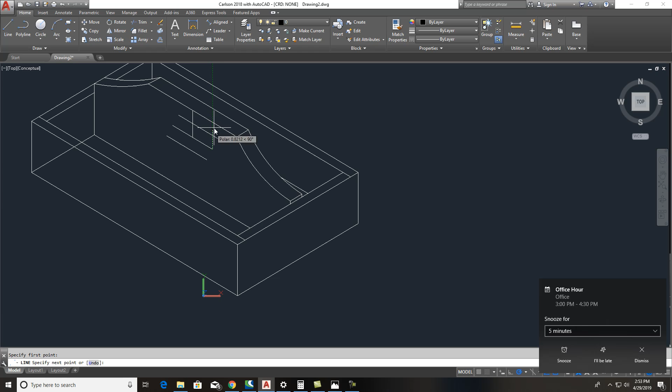It would be 1 inch, so it'd be a 1/2 inch offset of 1/2 of an inch. Make sure offset 1/2 inch up, 1/2 inch down, and then the line, we are coming off this line right here, coming straight up at that angle. Zoom in there, and I want to bring that line straight down.

Same thing over here, because the midpoint I had it exactly correct, and all I have to do once I get that in there is do a trim and clean all that up on that, and then we'll extend over.

Just like that, and trim, or we can actually just grab the grips at that point and pull down. So I'll show you real quick how to do this, and it's pretty simple.

What you want to do is, this is the center point right here, and this is the center point over here. And what I do at this point is, we have got to get that curve going. So I want to show you how this works. It's not on all of them, but what I would do is, it's another inch past this point right here. So I go another inch over.

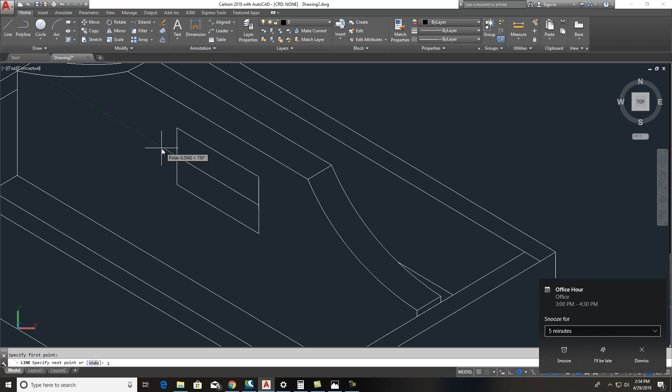And I want to make sure that it was an inch. It looks a little bit longer than an inch, so it is an inch up that way, and then it's going to come another inch down this way.

Okay, and then at that point I'll just grab this, and I'll do a copy, move that out there to that point, and I'll move it to that end point right there, and just grab, pull those on over into those positions.

And you kind of at that point are getting an idea of how this thing's starting, it will look. This is how you do that. So inside this box here, this is your center point.

Oh, wait. That should have been 1/2 of an inch. I've got it going 1 inch. So what I need to do is back that up just a little bit, about halfway.

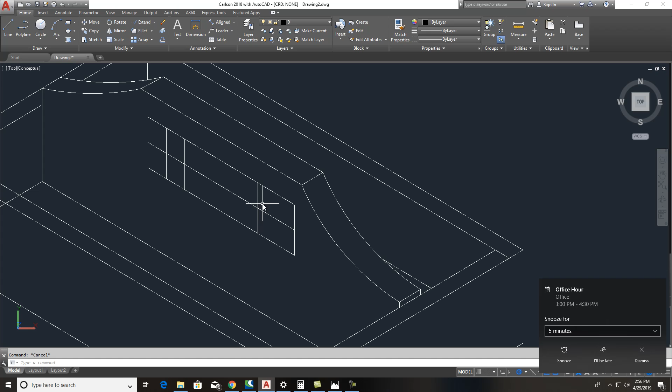Again, what I would do, just do a move. I'd grab this from there. I thought that looked a little bit too far to there. And we'll do a move on this one. Move from there to there.

And we'll do an old trim, and we'll trim out all that junk. Went a little bit too far with that. That's fine. So what you want to do at this point to figure out how to get that in there accurately.

This works with anything, it's called plotting points. Now I want to take, and I want to get this one piece right here, I want to bust it up. So I go up here, and there's a tool called break at point, right here it is, break at point. Click on it, click your line, and then click at that point, and see how it separates it, makes it one piece.

And you want to do that down here too. Break at point, click that, and come down here and click that. Now see how it's separate pieces? And you could always do this. You could always just grab that and pull that back, and it'd be a line by itself, and then pull this over. You know, you could do that, and that makes it individual pieces.

Just whatever works for you. It all works the same.

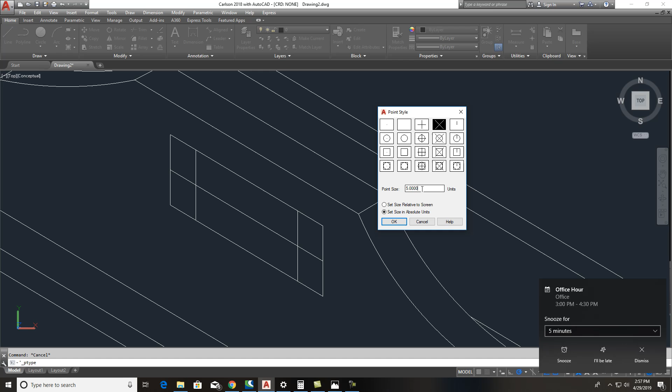Now, what we got to do is, I want to show you, you're going to go up here and click this button and hit Show Menu Bar, and go to Format, Point Styles, and I want to click on this, Absolute Units, and I'll do like a 0.25. Okay, and then I'm going to come back up here, and I'm going to go to Draw, and I'm going to do Points. Let's just see, that's perfect, that point is.

It's a little bit big, so I'll go up here to Format, Point Style again, and let's make that a little smaller, like 0.100.

That's getting there. Maybe a little bit smaller. I don't want them too big. Let's go about 0.05. That's perfect.

So what you want to do is, with that style on, hit Line, and this one right here I want to bust this thing up, let's say 4 times. Come up here again and see how these points, there are multiple points. Here is divide. You're going to divide this line up 4 times, let's say. You see that? Then you come up here to this one right here and do the same thing, divide it up 4 times. So whatever you divide this one up, you divide this one the same amount.

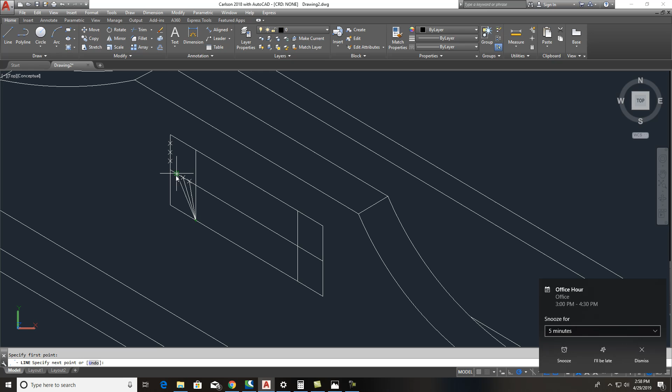You take your line and go from this point and come up here and hit these points right here from this quadrant point on here, just like that. Then you're going to hit extend, because those lines have to come all the way up and touch these 2 lines. Right click to enter, click on these, and you see how it kind of pulls them up. Now you come off the top of here and you click onto these guys here, just like that, into there.

And now where these cross at is going to be your points. So you just go up here and hit draw points and click this one to this one, zoom in here to that one, and then on down here to this one, and we'll hit a point right there. So once you get those in, I'll clean these lines up.

You can see it now how it's going to go. If I have me another point in there, which you don't have to have the points because we'll take them back out. But don't get the segment of the lines confused. But if you come up here now, hit Polyline, you go from here to there to there to this one and then on down. You'll have that part of it done.

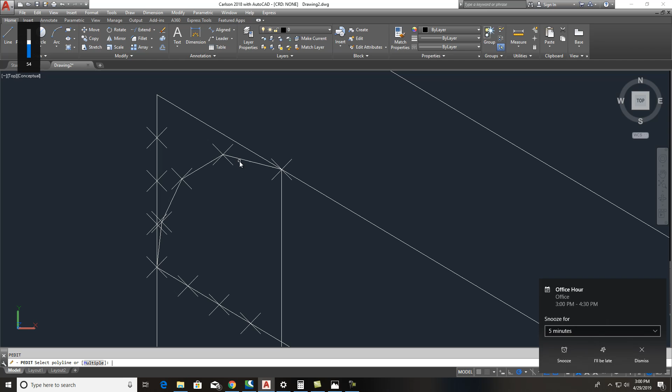Now I know it looks a little bit choppy. The more points you have, the better it is. But if you remember, if you PEdit and hit click on it and hit fit, it'll smooth it out.

You see that? Now I can go ahead and delete these because I don't need these. I need these again because I need to do the bottom. And you can see that. Now I got that, so I don't need these points anymore, so I'm going to delete those out. I use those to get that. So there's my top curve.

Now let's get the bottom one down here. So again I got to divide and bust this line up right here. And that's easy to do - come up here to draw, click on divide, click on this 4 times because that's what this one is.

Hit your line, come up here from the top, and remember, hit these right here first, just like that. And then you're coming down here to from this pole, and you're hitting these points. It's always, if the ones on the side, always you hit them from the quadrant that you're in, like this one. You see that?

And then hit extend, click on these 2 segments, and then come up here and click these, and it'll shoot those lines on out to those. And now you're ready to put points in. There's a point, there's a point, there's a point, and it'll close it up right there.

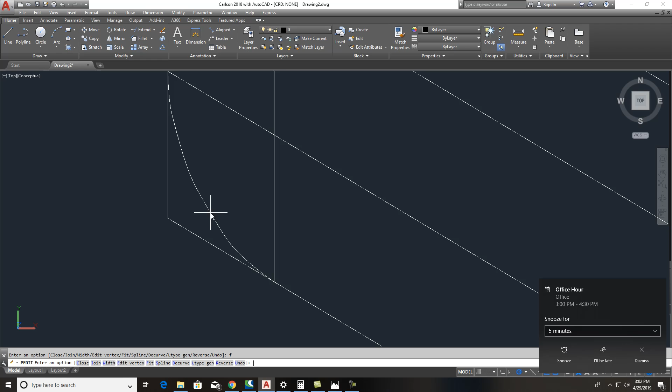We just got to do a polyline edit and smooth it out. PE, enter, click on it, and hit fit. It smooths it. You see how it smooths that out?

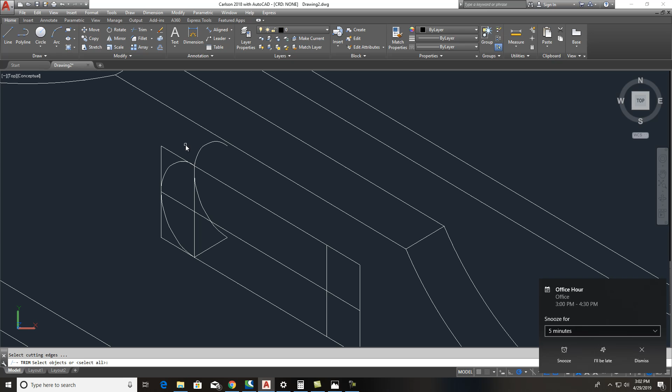Now all you have to do, line. This is a 1/2 inch thick, I think - yeah, 0.5. So right there is going to be the end of that. So you just grab this, and then you're going to do a copy and catch it from there to there, and just trim out what you won't see, like this. You won't see all this up here.

Those segments, just make sure you get rid of those. You don't need that anymore. And you'll see that part of it. Now this line will actually come straight down through here, and we'll just take it to there for now. And you won't have that little line right there, it'll just be a curve in it. And then you can go ahead and get rid of these segments here as well. You can start to see how that's starting to come around.

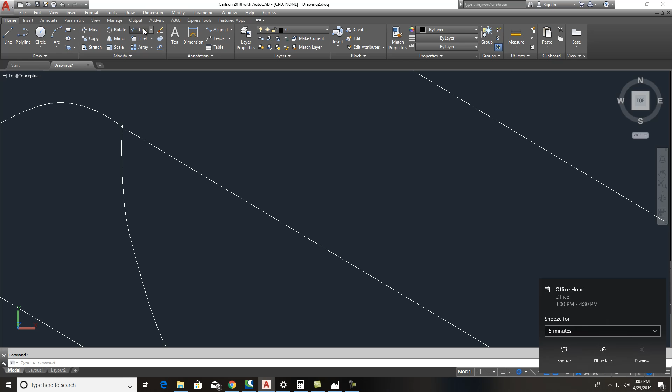Trim, there's a little segment there that needs to come out. Okay, and then all you got to do is come down here and do the same thing on this side, same thing as what we did over here, and I'll show you on that.

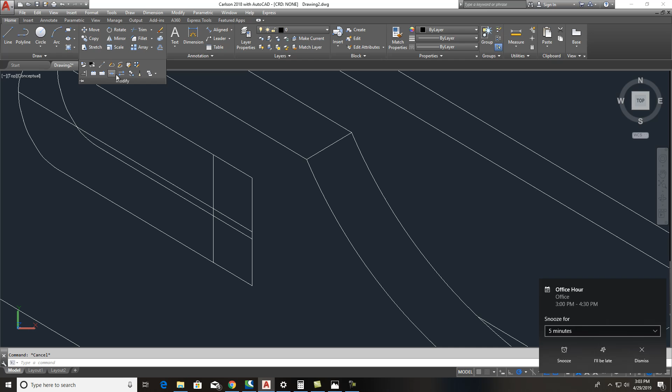Again, come up here, we need to bust this right here up. Okay, and then we need to bust this one up. So again, modify, break at point, click this right there. See, this is a segment, this is a segment. Wait just a minute, I think I got confused on that.

This right here is my center line. So what I'd have to do is pull that back up there to there and pull this one up there to there. So our segment pieces look good, looks great. And I need to bust this line right here up, so break again at point. And see, those are segment pieces.

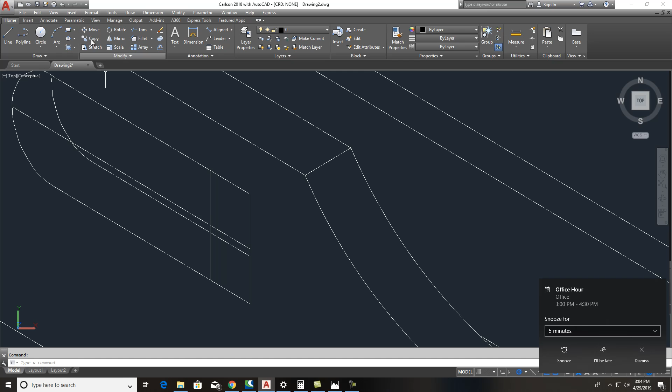And all I got to do again, and I showed you up here with points, but this is just a real quick easy trick here. Hit line up here, well we have to do it, we have to divide this up. I'm going to divide it 4 times. Divide this one 4 times, and then we'll divide this one 4 times just to make it quick and easy.

Line from the top, space bar lets you repeat really quick. From there to there to there to there, and then you're going to come over here and grab these, and then we'll just extend our lines out.

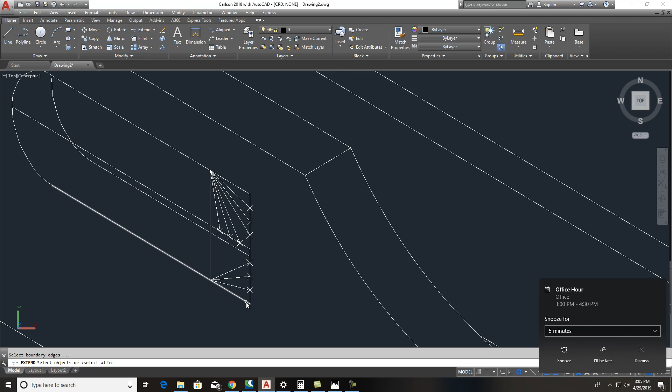Like that, I didn't mean to put the, yeah I did. Those are good, wait just a minute. We'll have to hit those in a minute, I wasn't ready for those, but that's okay. And I can put those points in there. I don't have to if I don't want to, but if you want to, just come here and click on these just like that to that point.

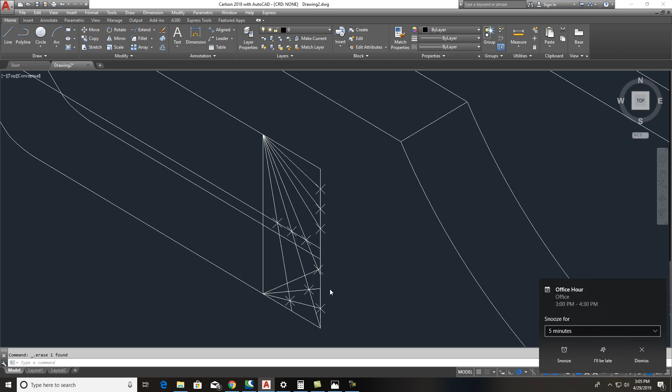I want to delete this one out just so I don't get confused. And then come over here and hit your polyline, catch there, to there, to there, to there, and all the way up to there.

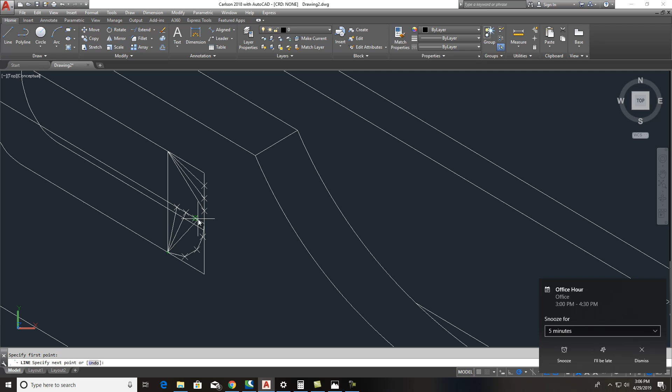And then we're going to, up here at this top side, we'll get rid of these 3, and you're just going to take, and I'll get rid of those. I don't want to get my polyline there that I just made the curve. And you're going to have your line on this one come from the bottom and hit these points. Extend this one to this one, and then you extend those up where they cross that.

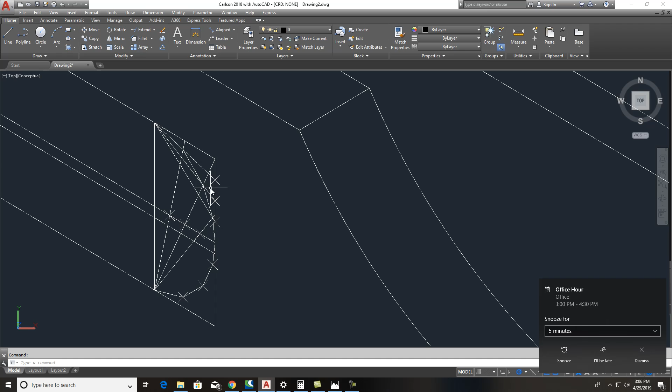Now you can just do this. You can hit polyline from here and just catch points like that, and then down. You don't have to use the points, but they're sometimes pretty handy if you do. I hit polyline edit, click on it, do a fit, do another polyline edit, come up here, touch that, and do a fit.

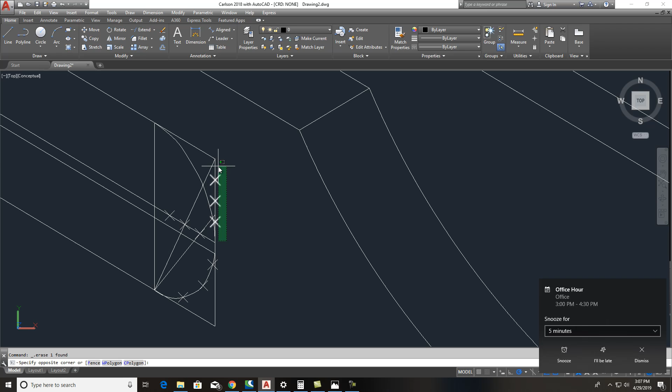And let's get in here and clean some of this junk up. We'll get rid of all those, all that. And you can also turn those points off instead of deleting them, but I'm just deleting them just to get rid of them.

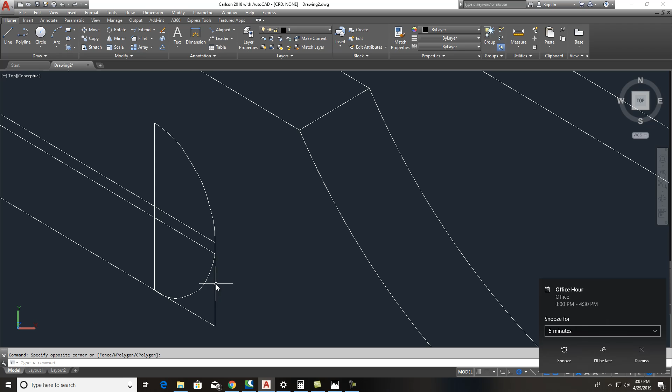And now you can see, oh, I deleted more than I wanted. And you can see this thing, how it's come together, and tie that in there wherever it meets. And I'm going to get rid of that. The center line, I'm just going to go ahead and pop that out of there and get done with it.

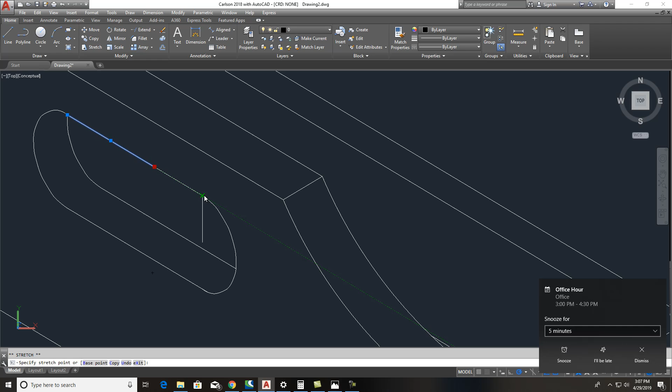And that's how that would come around through there. This would come back and catch it right there. We get rid of this. And basically that's what that handle, that's how I would go about putting that in there.

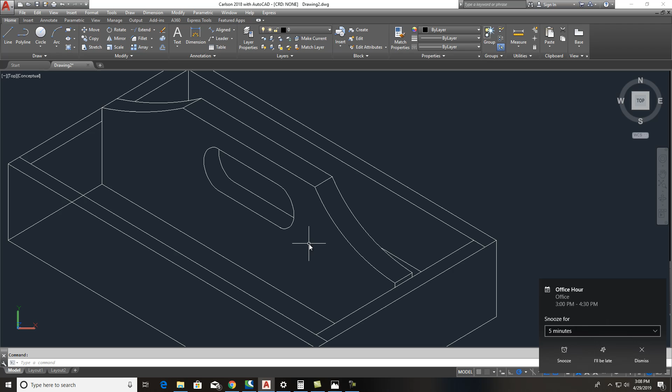So if you have any, and this works on all of them. It works on the isometric and the dimetric, the trimetric, and it works on the oblique and different types of projections. So that little method I showed you works for all of them. If you have any questions, just let me know.